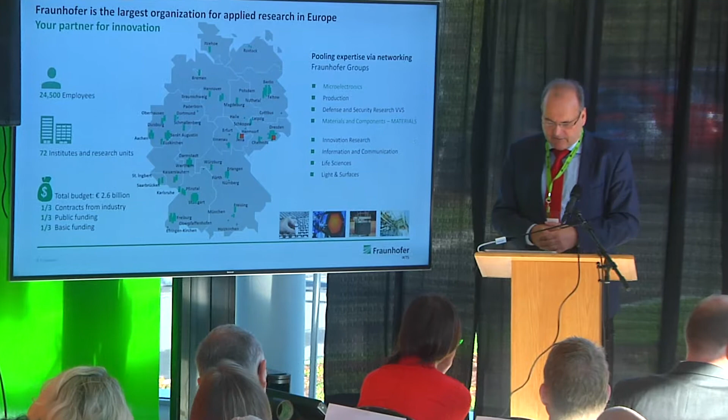General Counsel Menzenbach already mentioned Fraunhofer, so I can skip almost the first slide since she already explained it. Here are the latest figures: 72 institutes, pretty uniformly distributed all over Germany, roughly 25,000 employees, total budget of 2.6 billion euro. Importantly, this budget doesn't shift much, roughly 70% of this budget...

What can I do? Sorry. So Fraunhofer only has technical problems with slides. Usually in projects, no technical problems occur.

So 70% of the budget comes from work with industry. We get certain incentives when we earn money from industry doing projects, and the base funding depends on this as well. So our mission is clearly applied research. We do research for money, and we know how this works and how to provide results to industry.

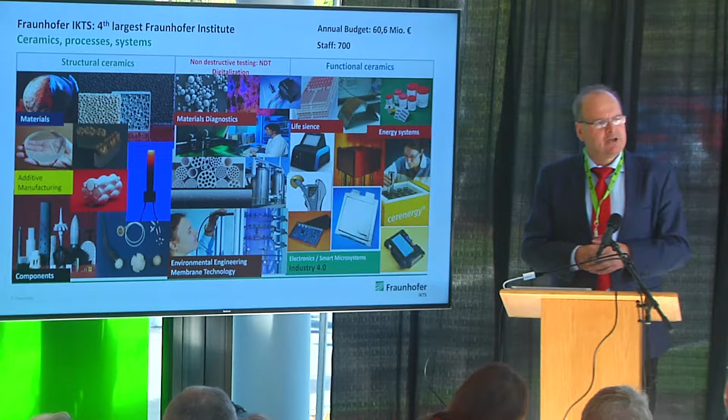Now to my institute. We are the IKTS, Institute for Ceramic Technologies and Systems. Roughly 700 people, a budget of roughly 60 million euro. We are the fourth largest Fraunhofer Institute, and by far the largest one in the eastern part. We cover ceramics in a very broad sense.

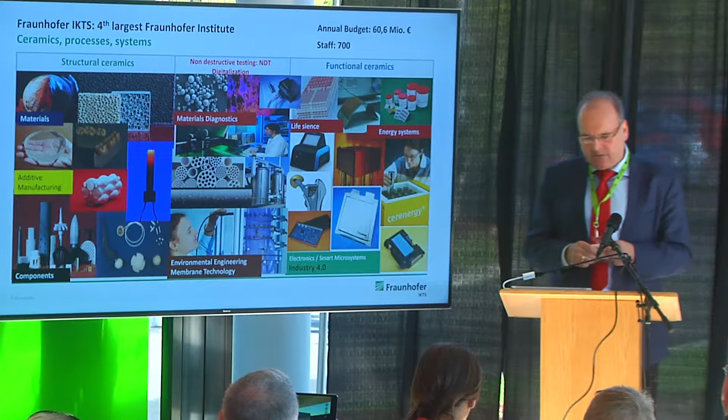This is a busy slide, as it's an attempt to summarize our core competencies on one slide. The basic message is we have two major divisions. One is structural ceramics, where we make all kinds of fancy components for machine engineering, automotive industry, and medical applications. Importantly, we cover the whole value chain, starting from synthetic ceramic materials and going up the whole chain to make components. The specialty of Fraunhofer is we can't only do this at lab scale—if our partners need 100,000 or even 1 million parts, we also do pilot scale developments to test markets and share risks.

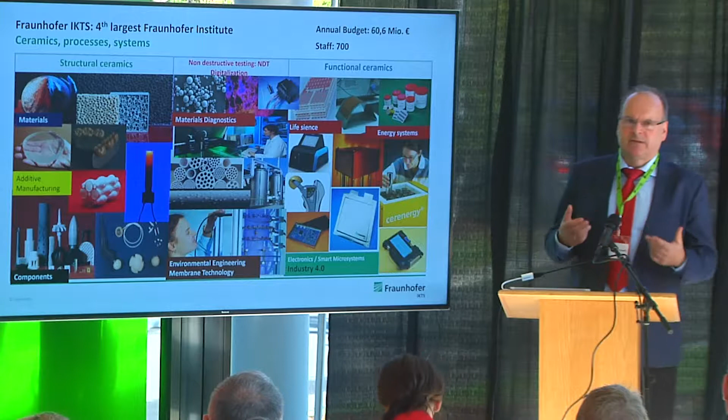The other division is functional ceramics, which is even more important. Not many people are aware that the whole world of electronics is a ceramics world—every capacitor, resistor, coil, and microchip consists of ceramic materials. Ceramics can also have nice ionic properties, meaning battery technology, fuel cells, and a lot of energy technology also involves ceramic materials, which is an important field for us. In between, we have a big group of roughly 200 people working on non-destructive evaluation and testing technology, which is very important for new kinds of sensors for digitalization technologies. I will come back to this later.

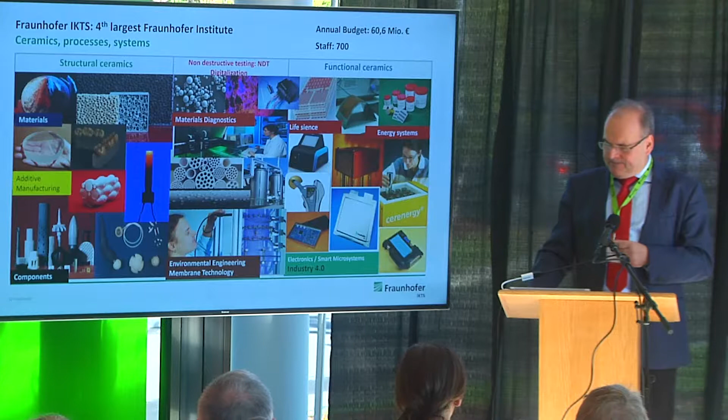In this center, we will focus on membranes and porous ceramics for water treatment, but also other kinds of environmental issues.

So what is our core competency? I will illustrate this with one value chain, as you see here.

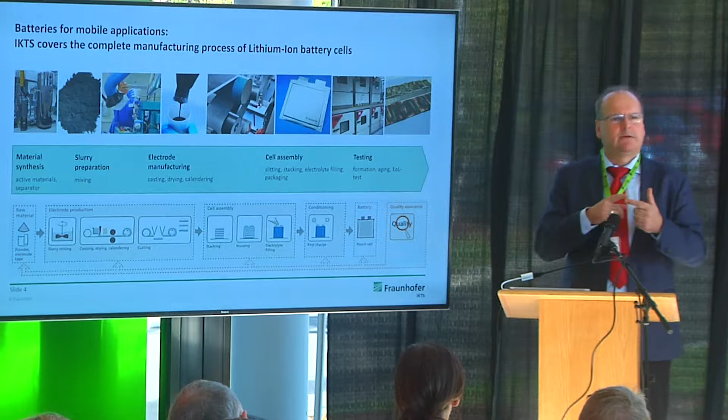It always starts to the left here with a ceramic powder. This is already a big know-how, how to tweak the properties of these powders, to make a good flow, to make it very uniform, to make a powder that can be used in the next process steps. Out of this powder we make a slurry, and then we deposit this slurry on surfaces, and out of this we stack some surfaces and we make systems out of it.

In this case you see a lithium cobalt oxide powder, can also be other kinds of powders which are used for batteries. So lithium-ion battery technology, for example, is a classical ceramic technology, and we do a lot of work in this field. This is classical ceramic technology.

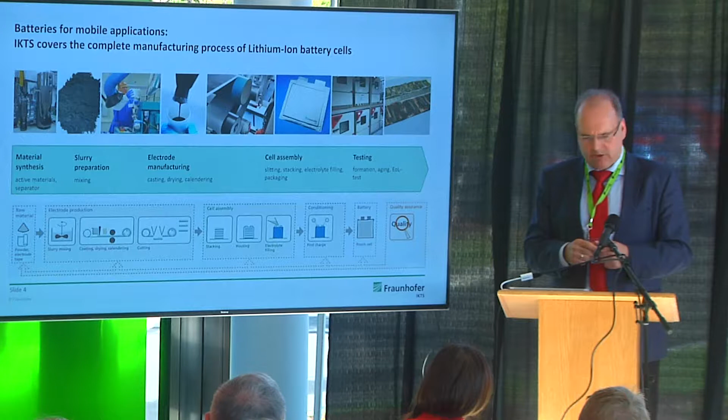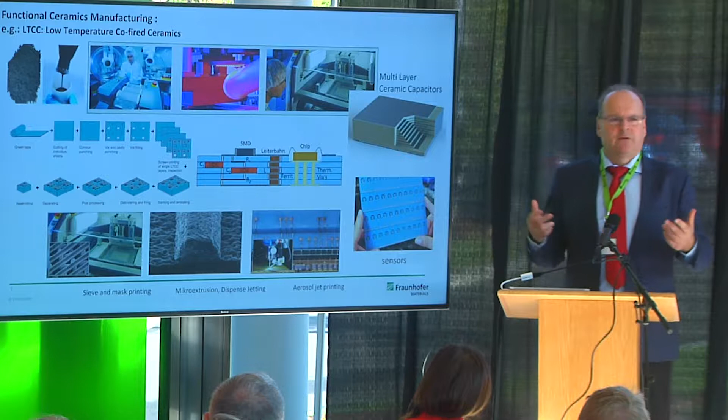Another example, you see the same again. Ceramic powder, then we make a slurry out of it. This ceramic powder can have every thinkable physical or chemical property. It can be insulating, it can be semiconducting, it can be conducting, piezoelectric, ferroelectric, ferritic, also magnetic.

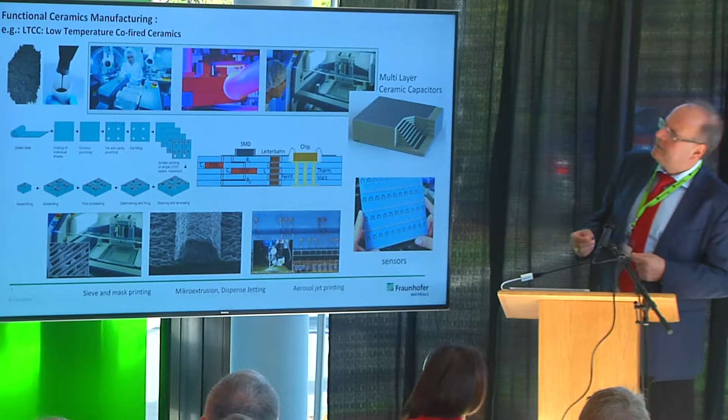And then you can make a paste and ink again out of it and print this property on surfaces in order to functionalize these surfaces. This is very established technology.

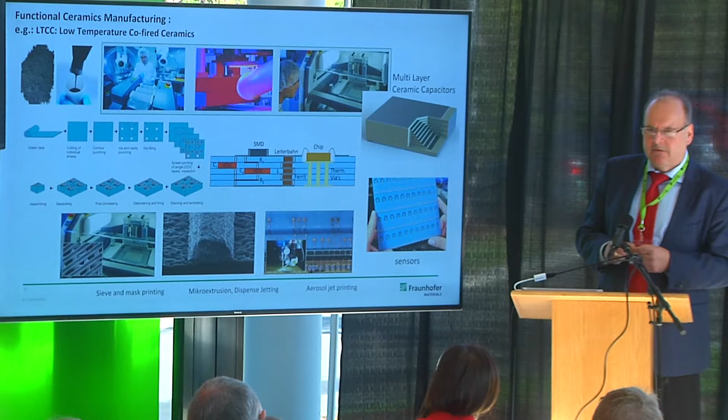For example, a lot of microelectronic devices, sensors, depend on this technology. So you can print these ceramic paste and materials on ceramic substrates, you stack it, and then you come up with three-dimensional integrated electronic components or sensors, as you see here.

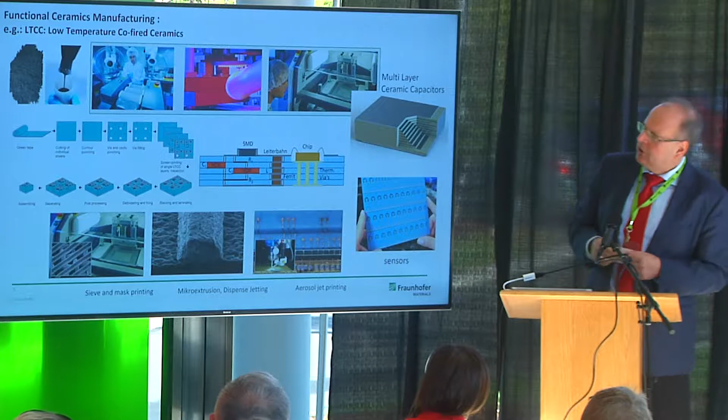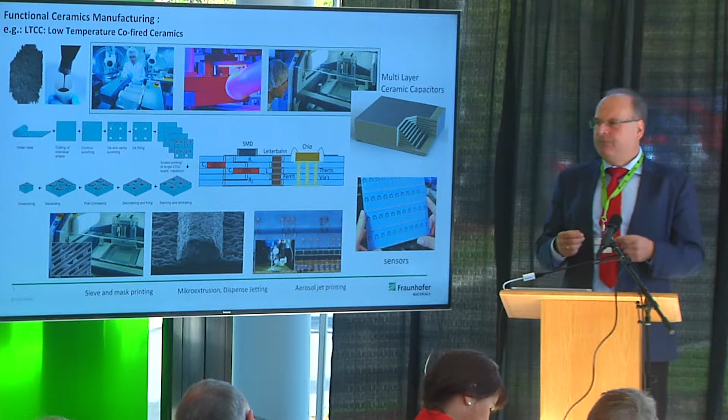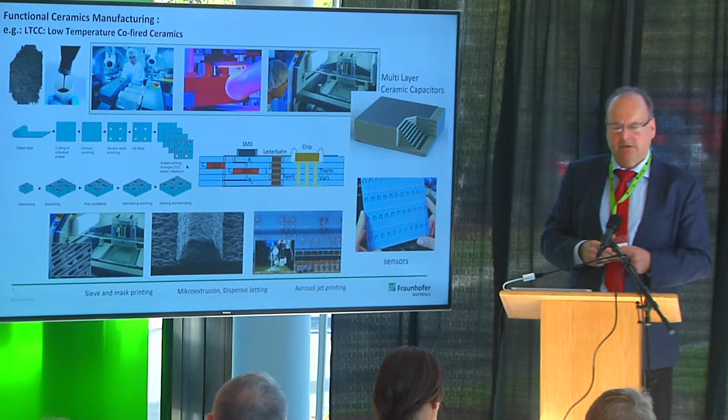Sometimes there is this rumor that ceramics is too expensive for applications, but this is not true. This is the most robust and most productive technology you can imagine, and this is really very much established. And we use this platform for electronic components and also to make a lot of sensors.

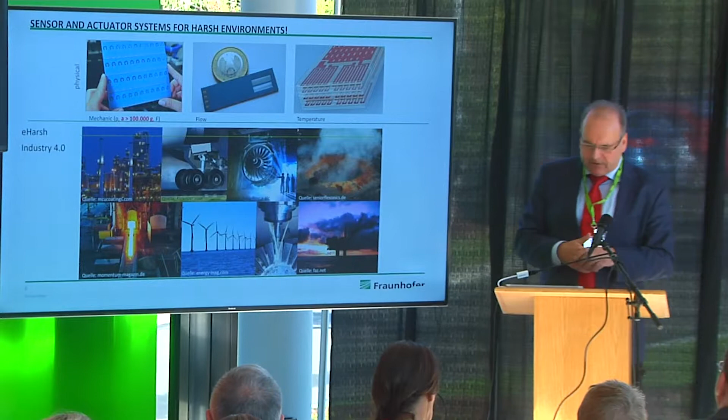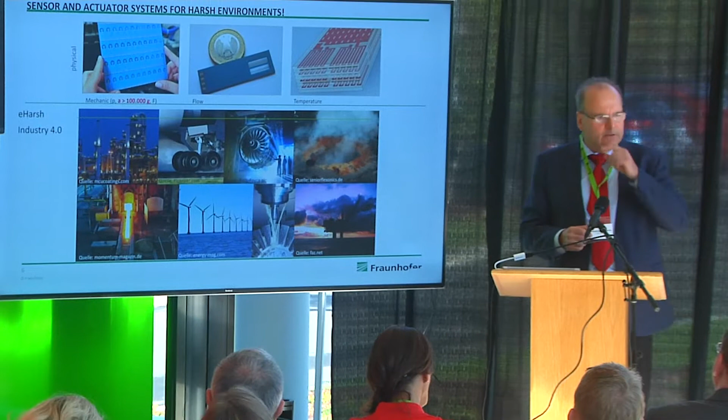Here you see just some examples in the top row here of some physical sensors that we are developing. Can be pressure sensors, acceleration sensors, flow sensors, temperature sensors. Here you see an acceleration sensor that can cope with 100,000 G, showing with what extreme conditions ceramic components can cope. Has some military applications, unfortunately, here.

But for us, it's very important to use this technology to develop sensors for Industry 4.0 applications or Internet of Things applications. When you go into this digitalization world, it's important that you collect data. And it's better to collect these data at the place where the action takes place, so where you have high temperatures, harsh chemical environments, harsh strain, or something like this.

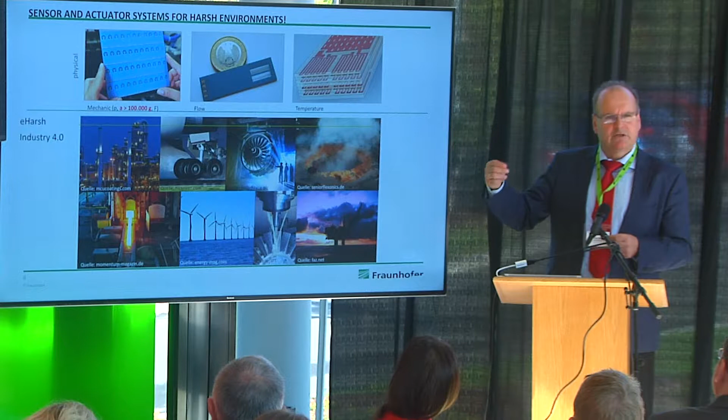This is a big field in our institutes, to make new kinds of sensors which can cope with very harsh environments and to use this for all kinds of digitalization technologies. This is very important. And then, of course, we want to combine this.

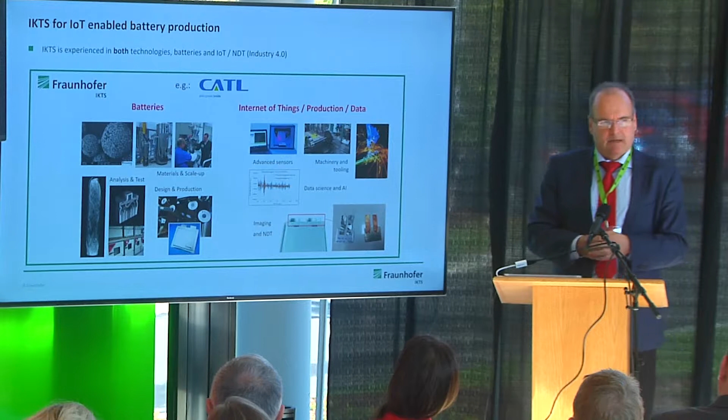I was briefly talking about the battery technology. We have a lot of know-how how to make batteries. But we also have this digitalization know-how, including software engineering, artificial intelligence approaches, and the combination is excellent, because our goal is not only to improve process for battery manufacturing, for example, but to come up with complete digitalization processes.

For example, we are pretty proud that CATL, the biggest battery company in the world, Chinese-based, came to our country, and they were not so much interested in our battery materials know-how. They were much more interested in digitalization, because they say, when we come to such a high-level country, we do not just want to copy a process, we want to come up with the best process in the world, and for this we need this digitalization technology.

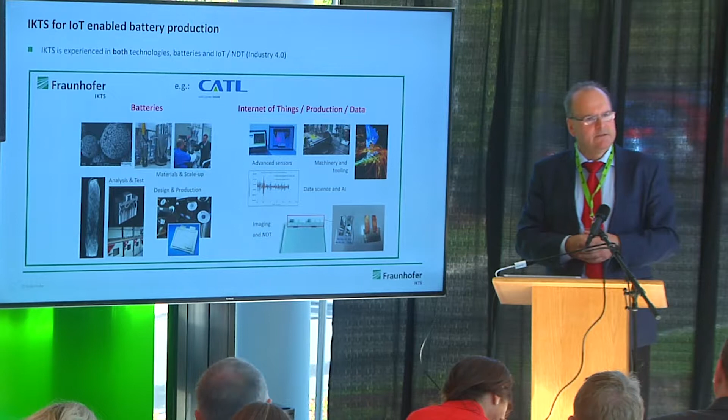So this combination of materials know-how and the sensor and digitalization know-how, I think this is pretty unique. And this is something we also would like to use for membrane technology, because here again, we cover the whole value chain. You see here the ceramic membranes that we are developing.

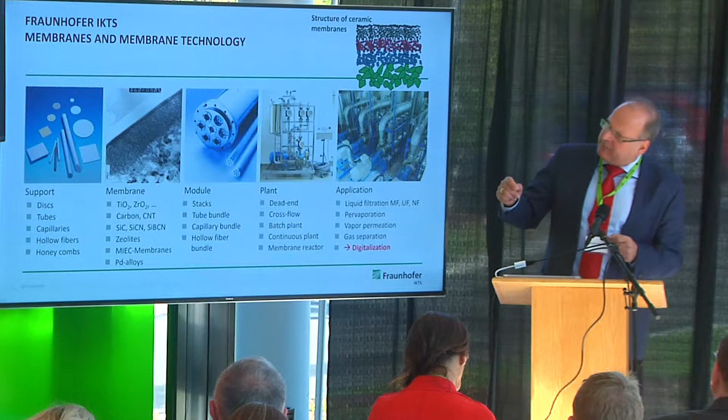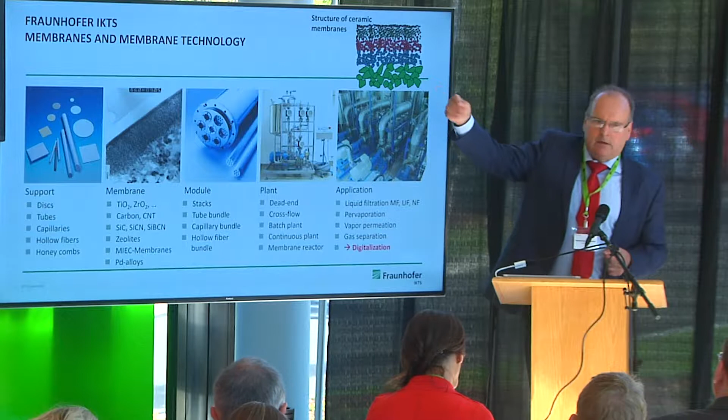We start with ceramic substrates. You see on the left planar substrates made by tape casting, pressing technology, or tubular substrates made by extrusion technology, for example. These substrates are porous, have a microporosity, and then by our printing paste technology we print the active membrane layers on top, and they can have a porosity down to the sub-nanometer regime. Here this printing technology, that we learned from microelectronics, from battery technology, is applied to make functional membranes. This is what we want to bring to the US.

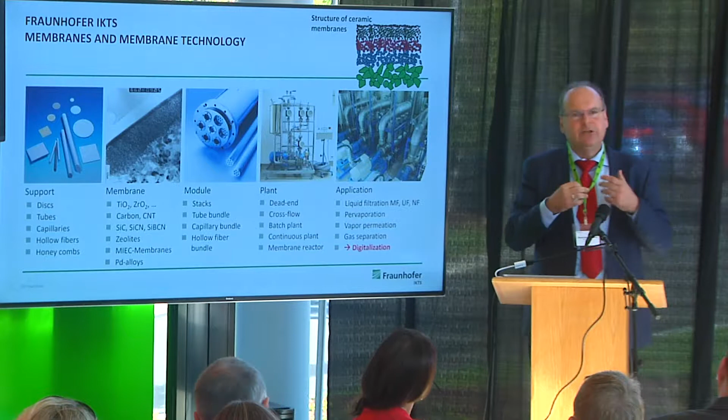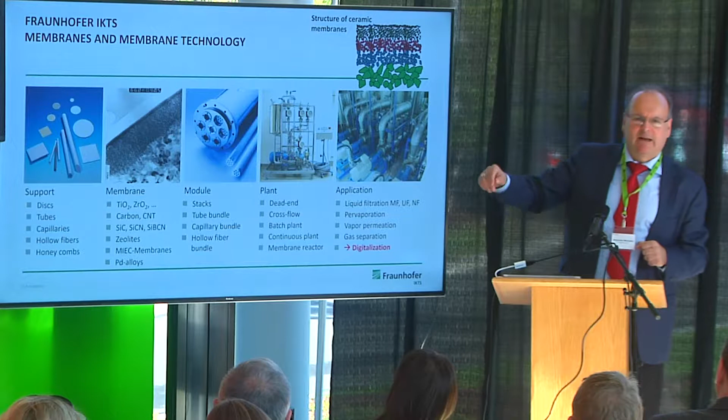Believe me, that is really very specific core know-how that you need. Out of this, we make modules, so membranes 1.5 meter high, or in the US I have to say 5 foot, I think, yeah. And we can assemble this to make modules and then up to really demonstration units. This is something we would like to do along with Jeff.

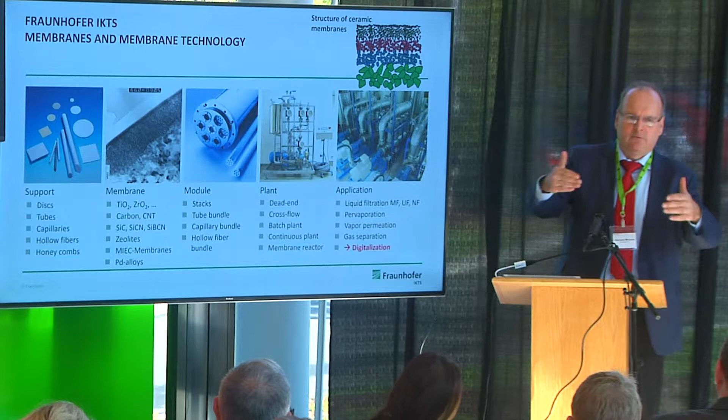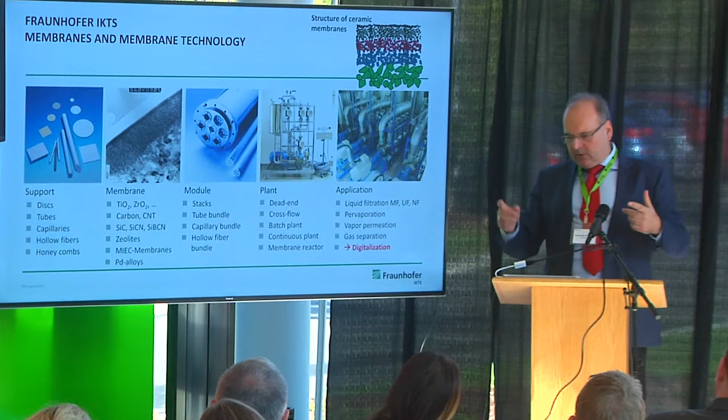So we can supply these membranes in any quantity you need. We would be happy to hear that you need 100,000 of these pieces. We will send it to you, and then we will make nice demonstration units according to the needs of the US market. So this is our core competency, and of course there are already some nice examples. Ingolf Vogt will have a talk, and he will go much more in detail.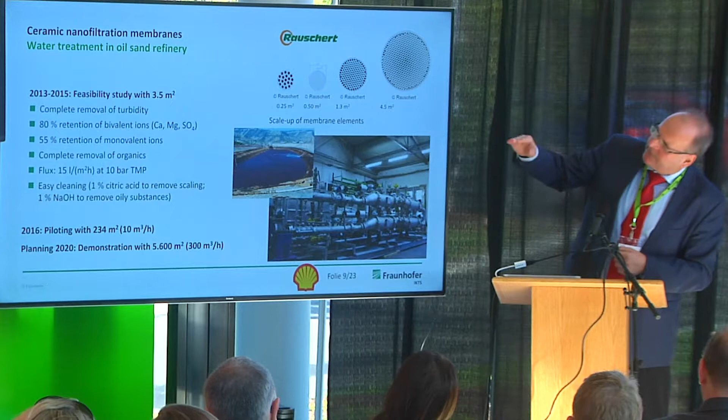This is an example of development along with Shell company for oil sand refinery. The beauty about these ceramic membranes, they can cope with these harsh environments. In oil sand refinery, you have particles, you have critical chemicals, and it's not so simple to really treat these polluted waters that are generated. By this technology, that we first demonstrated in feasibility studies, now in pilot structures, we see that we really can purify or treat this processed water and cope with these environmental issues. This is just one example.

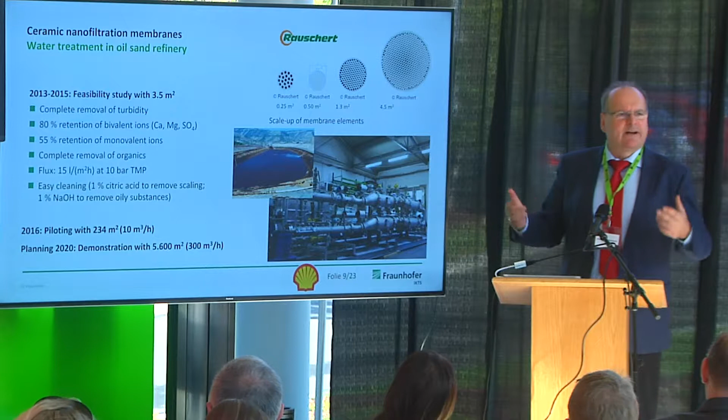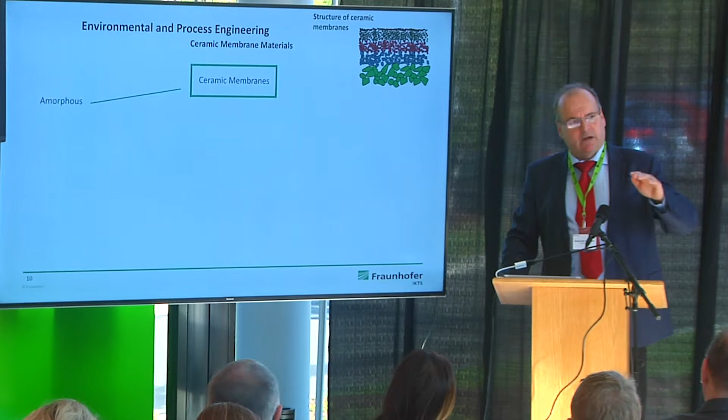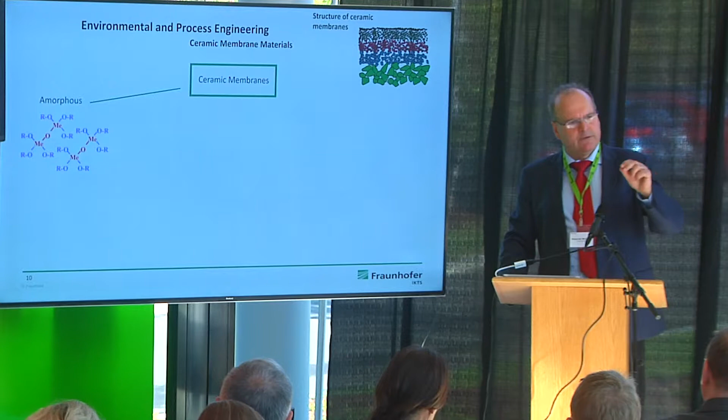More examples are shown here. So we make these membranes out of a lot of different kinds of materials. You see here, for example, oxides, all kinds of oxide ceramics that can have an amorphous structure, and here we make sure that we have a nanoporous structure. We also use zeolite. Zeolites have this cage structure, and the cage opening can be used for filtration as well. There are different zeolites with different cage structures, cage openings.

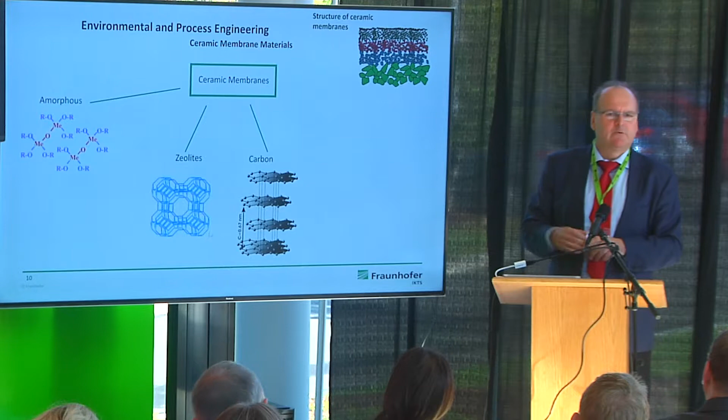We can use graphites, and here the lattice distance can be used for filtration purposes. Nowadays you should not say carbon or graphite, you should say graphene. It's much more fashionable, I think, yeah? And you get more money if you tell, but it's still graphite, yeah? And can use this for filtration as well.

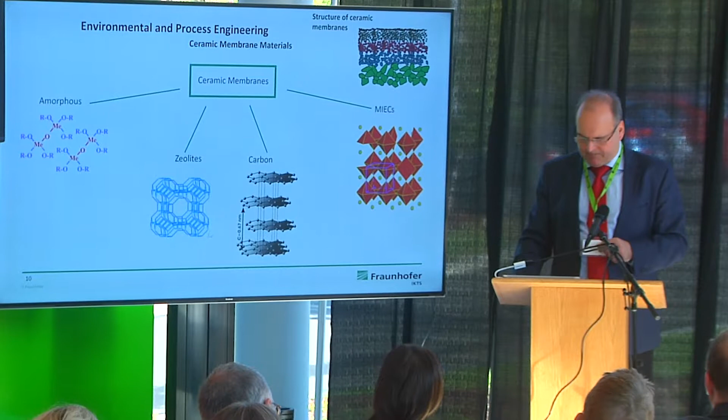And even dense layers can be used. This mixed ion electron conducting materials, perovskites for example, can also be used for separation of gases. This here is a certain perovskite we developed for oxygen pumping and oxygen generation. So this is how these layers look like in applications.

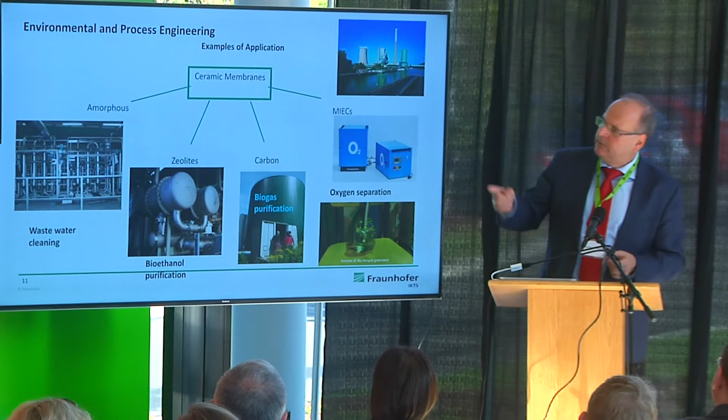So these oxide ceramics are used for a lot of wastewater cleaning applications. Here you see a unit that was used for textile treatment to produce water coming up from textile production. For the zeolites, we developed a unit that is able to separate the water out of bioethanol. When you produce bioethanol, you still have a lot of water in it, and now you use distillation processes which consume a lot of energy. When you use these membranes, you need much less energy to purify bioethanol.

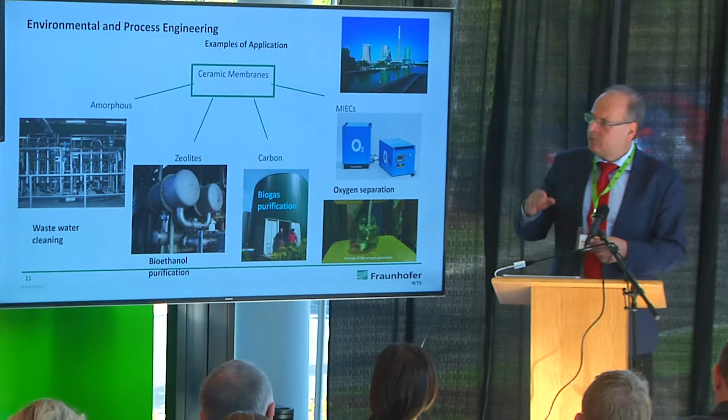Or these carbon materials, or graphene, that allow us to purify biogas. Biogas consists roughly of 50% methane, 50% CO2, and this membrane can separate the CO2 out of the methane. You come up with almost natural gas grade gas that you can put into a natural gas pipeline.

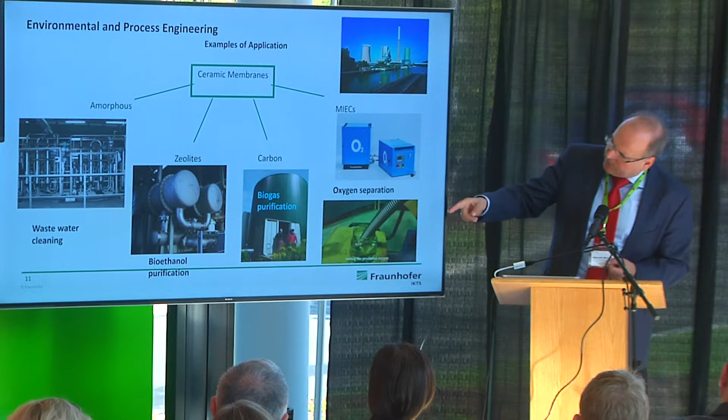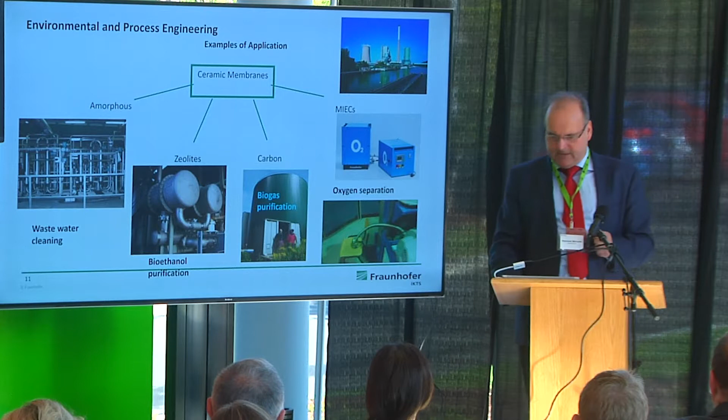And here you see an example for this mixed ion electron conducting perovskite structure, a unit that we developed and also presented at several Hannover fairs already. If you operate it, then it separates the oxygen out of air. You see it's now in operation, and here the oxygen is produced. This is a cigarette - it also allows you to smoke very fast using this technology, but also to produce pure oxygen for hospitals, for example, but also in large quantities. It's also very nice technology that we want to bring to the market.

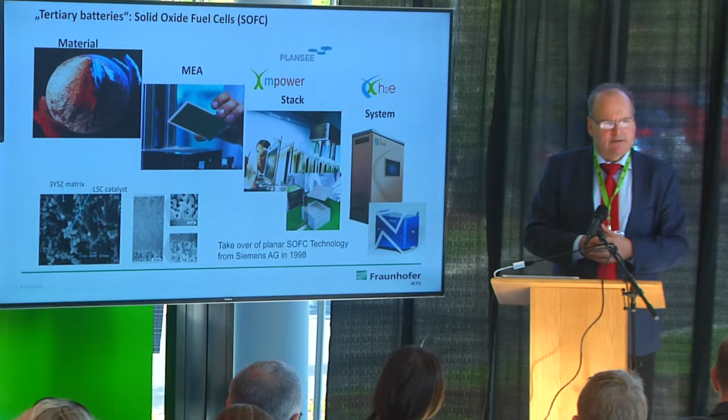We also develop other kinds of membranes. So when we talk about these perovskites, this is a mixed ion electron conducting membrane. We also produce membranes that can only conduct oxygen, and one important application is fuel cell technology. Here you see solid oxide fuel cells. This is a ceramic type of fuel cell based on this membrane technology.

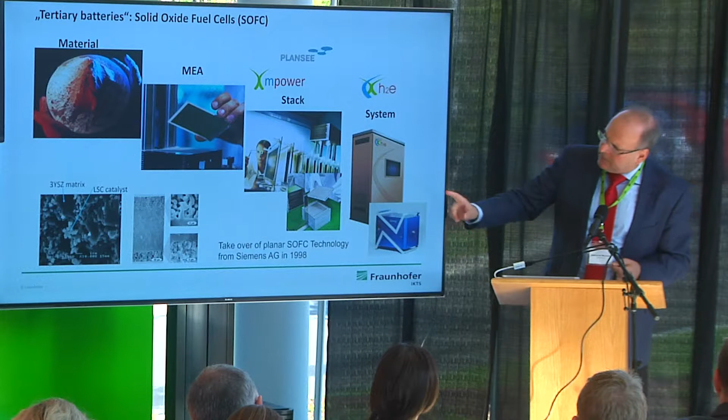And this is also something for the long term that we would like to bring here to the center. Based on this technology, we develop whole fuel cell systems that can be operated, switched on. They are certified for demonstration, and the use could be autarkic power supply of single-family homes.

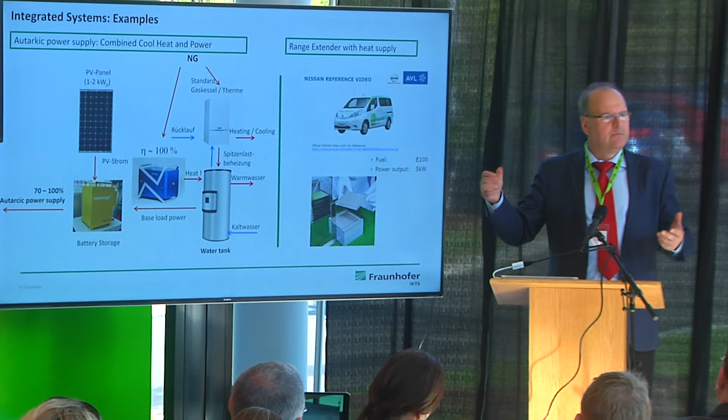So you can operate these fuel cells with natural gas. That's the beauty about these high-temperature fuel cells. They don't need hydrogen, they can also be operated on hydrocarbon fuels such as natural gas. And they have extremely high efficiency. Here you see an efficiency of 100%. The reason is that we produce power, but also heat, high-level heat, which can easily be used. And if you use both the power and the heat in such combined heat and power applications, then of course you have an efficiency of 100%.

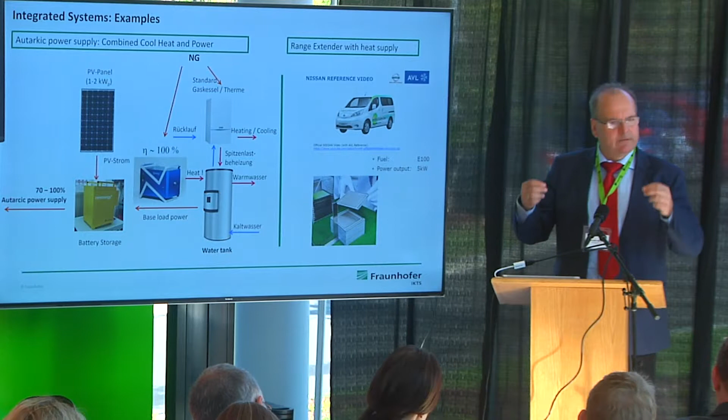And we think when you combine this with battery technology, with PV panel, you can come up with complete new kinds of approaches how to make autarkic power supply for homes. There's also big demand right now in Europe, and I think this is also promising technology. And we have all the units running right now. Also, range extender is an issue, I have no time to mention this.

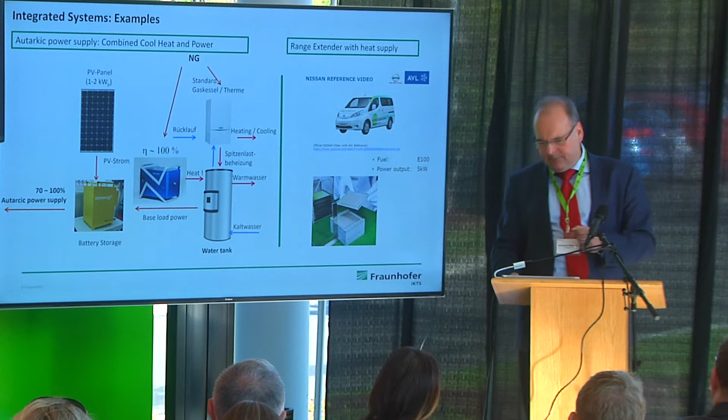The beauty about this fuel cell, membrane-based fuel cell, is they can also be operated in the reverse mode. Then you don't call them SOFC, then you call them SOEC, solid oxide electrolysis cell. And the beauty about this fuel cell, when you have power, maybe even excess power, when you have a lot of renewables, of course you can convert water steam into hydrogen. But this fuel cell can do more. It can also convert CO2 into CO. So you can also electrolyze or get rid of CO2 actively.

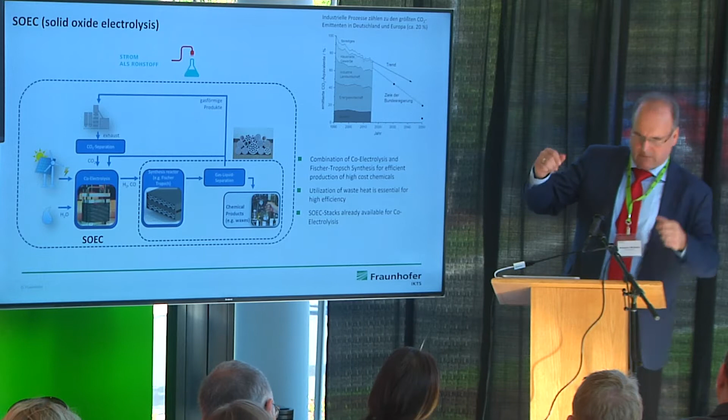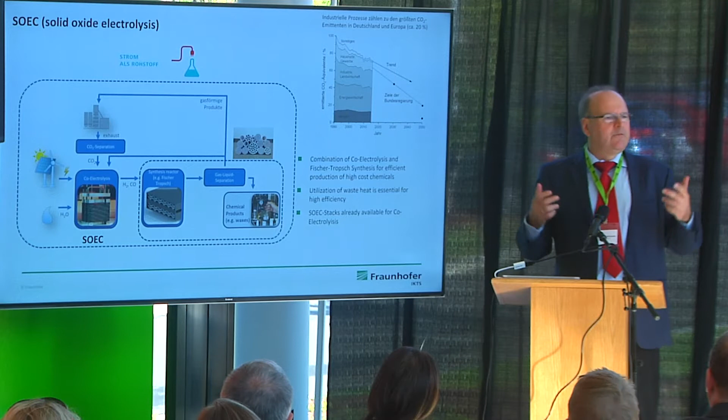That means when you have a CO2 source, for example out of air, and hydrogen, you can make synthesis gas, we call this co-electrolysis. And out of the synthesis gas, which is H2 plus CO, you can make valuable materials. You can make artificial fuels. It's hard to compete with Saudi Arabia right now here, but you can also make higher added value stuff: olefins, alcohols, waxes for cosmetic industry. So this carbon capture and usage, this is a big thing that we are working on, and we combine these fuel cells, for example, this new kind of Fischer-Tropsch technology.

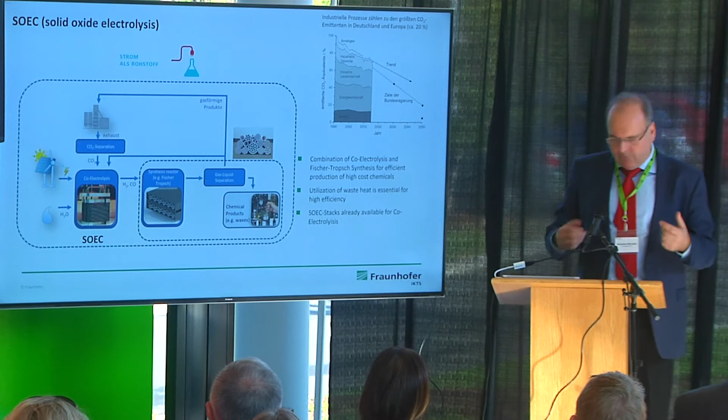Other applications of this, just one point here: here's a comparison of different electrolysis technologies, which is very important for future kind of storage. When we at any time come to hydrogen economy, or when we have a lot of renewables and we are able to store huge quantities of energy, you need some kind of electrolysis. And there are different kinds of electrolysis technology: alkaline electrolysis, another kind of fuel cell, PEM electrolysis, and then this SOEC. We work on all of these technologies. SOEC has a big advantage when you have a temperature source in industry, for example, because then you need roughly 3 kilowatt hours power to make 1 norm cubic meter of synthesis gas. 1 norm cubic meter synthesis gas has more energy content than 3 kilowatt hours. That means you have an efficiency of more than 100%.

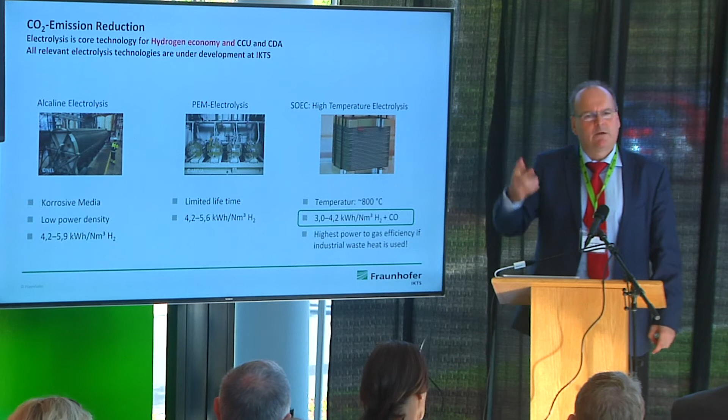Physically, this is critical, what I'm saying here. Honest - the reason is I just gave the power input here, so what kind of power you need. I did not mention the heat. So this technology also converts heat into gas here. And when you have this heat source, then this is the most clever technology and the most efficient technology for the storage technology. And really something we are looking into.

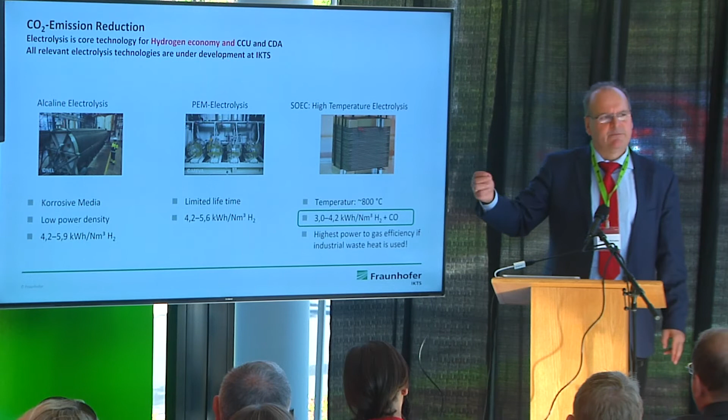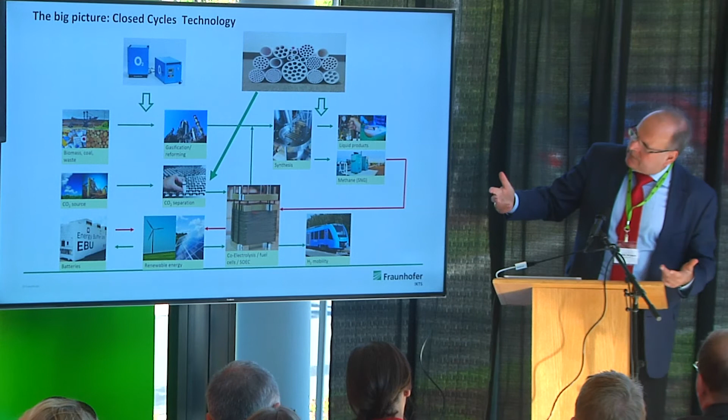And finally, the big picture is to combine all of this stuff, to really come up with closed cycle technology, to use waste, convert this by gasification technology into power, separate the CO2 - for this, for example, you need the membranes. Use this for co-electrolysis to make valuable materials, also to generate hydrogen or e-fuels for future technology. You see here we use the oxygen generator, we use our membranes, we use our fuel cells. Just to give you a flavor, I could talk at least about this slide another 15 minutes or something like this, but this is the scope that we see.

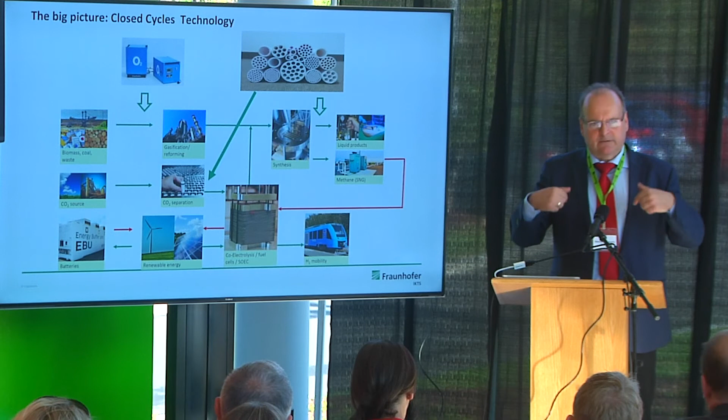So we will start with this membrane technology and water treatment, and I think we have excellent ideas how we will continue, but finally, in 3, 4, 5, 6 years, I would love to extend the whole scope into this technology, which I think has a lot of potential for the future, as everybody's talking about climate change and environmental issues.

We want to provide solutions here, solutions which even have economical benefit and which allow us to make money and to export some stuff. And here I think we have excellent solutions, and I'm happy that we can do this together in future. And I'm very confident and very happy about this collaboration. Thank you very much for your attention.